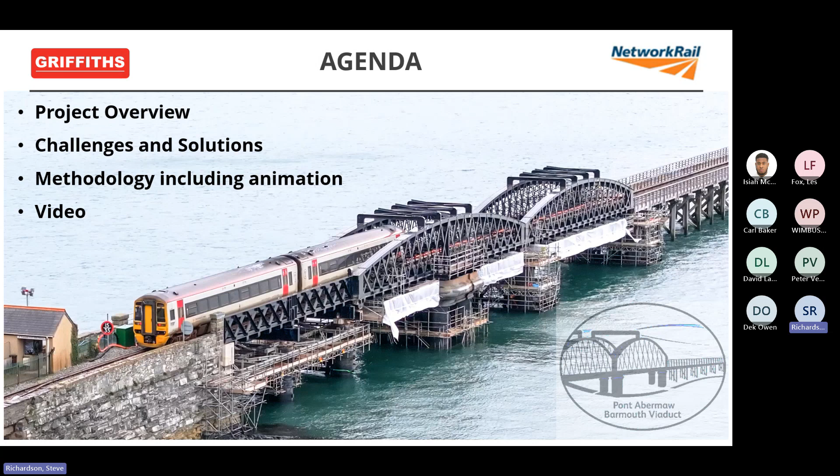And the video, which by the sounds of it, I'm going to have to apologise for now, because I suspect it may not run quite the way I want it to, but it'll hopefully give you a pretty good feel of what we did. So the viaduct itself, it was first opened in 1867.

It was originally designed by Henry Conybeare and Benjamin Piercy. It didn't look like the structure that we see today. It was actually a drawbridge, a short section for the navigation span. In 1899 to 1902 to be more precise, it was rebuilt into the structure that we see now, which incorporates the swing span.

A few minor interesting bits from that: the original piers 1 and 2 are from the very original 1867 construction. The other piers, 3, 4 and 5 - pier 3 being the one that supports the swing span with the 4 columns, then 4 and 5 after that, leading up to the timber one.

They were brand new on a slightly different alignment to the original one. And that's significant because, hopefully this can be seen relatively easily, these 2 beams here are there specifically because the alignment of the main girders compared to the cylinders is offset for those 2, because they changed the alignment when they did the reconstruction. That causes its own problems later on from our point of view in terms of how we actually reconstruct those elements of the bridge.

It's an iconic railway. It's Grade 2 star listed.

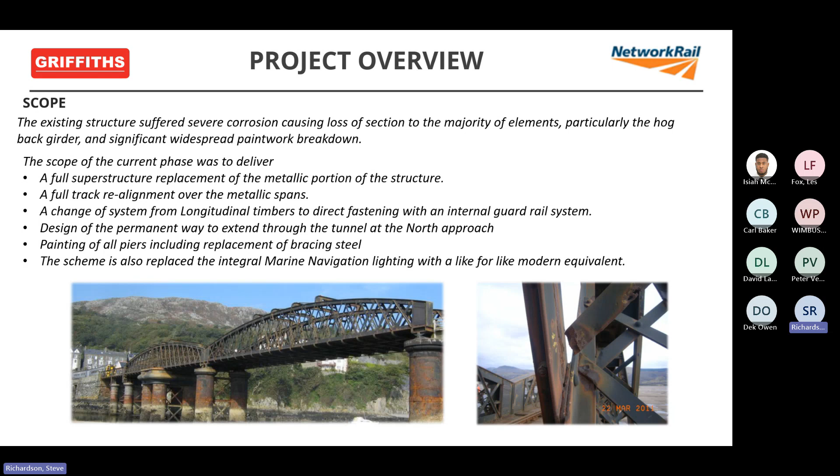Most of us, myself included, kind of shook our heads initially at that thought. But the first time I saw the bridge for the trial erection in Carvers, unpainted for that matter, with the rivets on, it was very clearly the right decision. Had it gone back without them, it would just not have looked right at all. It's quite crazy that that's the situation we're in.

So the bridge itself sits in a tidal estuary off Mawddach - I'll never say it right, I'm not even going to attempt it because I'll insult anybody that's Welsh. You've got a tidal range of up to 5 metres on spring tides. Parts of the structure towards the timber section, so Pier 5, the fixed span, often dry out at the extreme tides, whilst the navigation span never dries out. So we've got a combination of sometimes having water on bits of it, and at the same time not having water underneath other bits of it.

The entire area is triple SSSI, so that brings its own issues.

Originally, as part of the feasibility before we even tendered for this scheme, we considered a causeway. That was pretty much dismissed due to the fact that it's tidal, with a 5 metre range, and the impact it would have had on the tourist town of Barmouth. The work was carried out over the winter period, starting beginning of September into December for the main blockade, purely to minimise disruption for the tourist trade in Barmouth. But a causeway would have meant building at the height of summer leading up to that, which would have been a particular issue. So that was dismissed as a result.

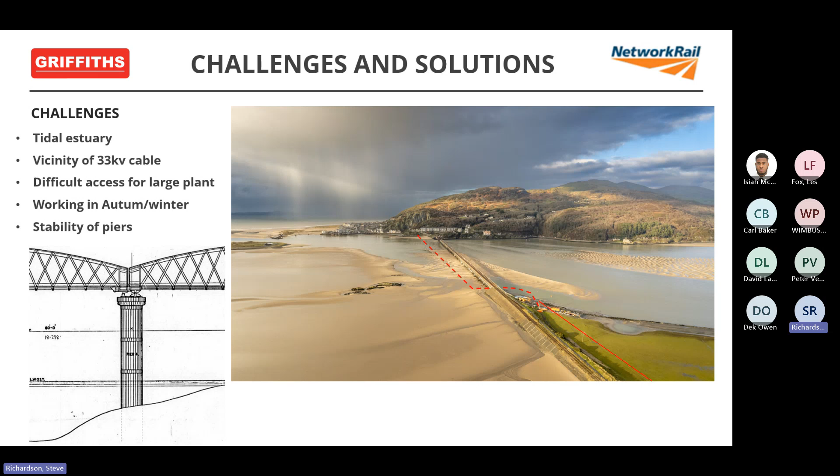Additionally, there's an FTN cable that runs across the bridge - one of my Network Rail colleagues described it as the M4 of information for the area. So there was no diversion going to happen to it, meaning we had to find a way of supporting that in situ for the entire time.

So we couldn't crane it in by sea, and we had to maintain stability for the piers. We decided to bring in pretty much everything in terms of the new works, to a degree, by rail. We've got a perfectly good railway system there - our site compound, which we already had for the timber refurbishment, has a straight track right to the bridge from north of the Barmouth Viaduct station. So we decided to bring everything in that way to avoid any waterborne cranes and such like.

What we decided to do is bring in two hogback beams and adapt them with a series of temporary works to create an 85-metre long runway system for a gantry crane. That gantry crane would then be used to demolish the existing bridge and to build the panel sections of the new bridge - I'll explain more as I go on.

So when we did the demolition, we literally cut it into 23-ton sections, approximately 4 metres linear length along the bridge and 8 metres in plan, and dropped them down onto pontoons - simply plastic pontoons, a bit of an adaptation of that type. It's a company called Scaflow who provided those. We dropped them down onto those and took them to a nearby beach.

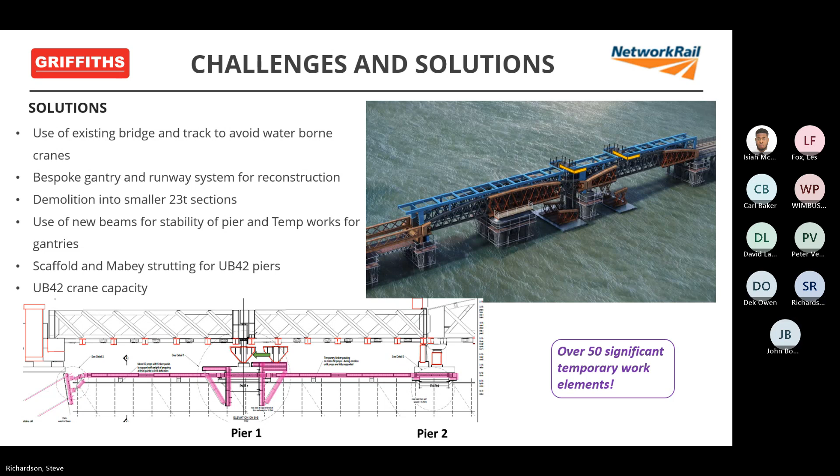Of note, there is 50 significant temporary works elements within the scheme, and when I say significant, I don't talk about fencing or hoarding or minor little pieces. I mean, there was temporary works to put temporary works in at certain stages with it as well. I'm talking about the gantries, the runway beams, the beams underneath that spread the load from the new beams in their narrow positions down onto the cylinders. Temporary works to change the bracing of the actual piers themselves. An awful lot of temporary works involved in that.

So, to get the hogback beams, which are 40 metres long, to the bridge, we adopted a Unimog, which is perfectly capable of pulling 600 tonne. This unit, as you look at that photograph there, is circa 200 tonne, just shy of 200 tonne that we brought it down in. We brought that down on 6 trailers, 4 40-tonne trailers and 2 20-tonne trailers.

Each one of them had their own bespoke piece of temporary works on it to spread the load back directly into the axles from the pickup positions that were obviously dictated by the actual bridge itself and the nodal points within the bridge. And almost as a suspension system, to be honest with you, we had 20-tonne jacks along the system, and that was used to basically stabilise the entire structure as she ran down to the bridge.

You've got to bear in mind that we were running on existing track. Now, the existing track on the timber structure was actually in pretty good condition because we'd only renewed it a year and a bit earlier, to be perfectly precise. The section between our compound and the bridge had actually been down for a renewal, but it hadn't happened, it had been cancelled. So we were running very much on the existing track.

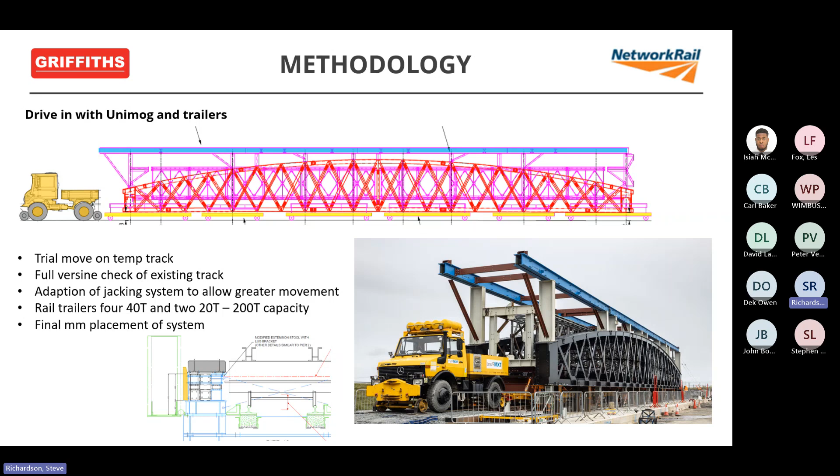This is a short element of the animation that just shows it being driven in. One of the things is the wind bracing on the top had to be raised up because the entire thing got brought in at higher than its final position, and it eventually got jacked down. I kind of skated over that because I'd be here forever if I talked about every single piece of temporary works.

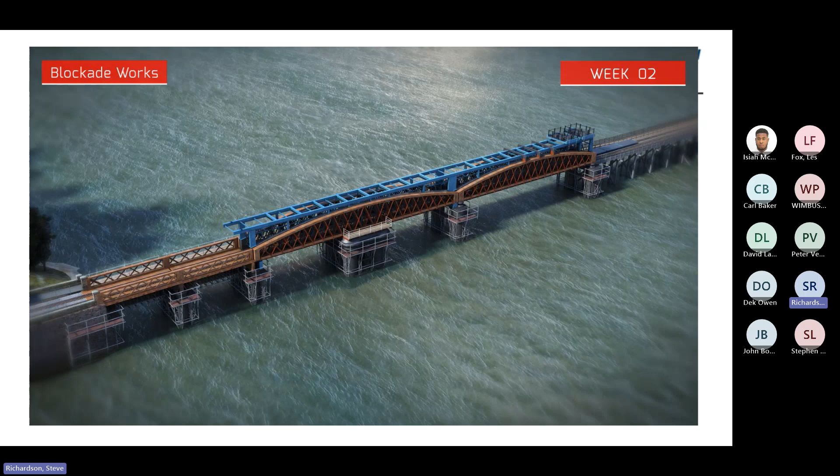Right, so once we got the hogback sections down there with the temporary works, and you can see the temporary runway being there, that's the blue section. All of the grey sections are all temporary works. The grillage that you can see running through the centre, that's all temporary works. That was simply to keep everything together, basically. Acted as resistance for when we jacked them apart.

It also acted as our access point. You can see the timber internally and the timber on top, so that was basically a walkway that we could then walk right across the bridge as we were doing the demolition.

So when we come to the demolition, what you had was beams coming off the underside of the runway, and the runway beams that then had Macalloy bars dropping down to a clamping arrangement on the top flange. Every one of the 23-ton sections had 4 of these. So basically, we would bring this in, connect it all up.

Once everything was connected up, the demolition crew could literally cut it into the 7 sections. They didn't have to wait for anything to be dropped or lowered or for us to do anything else. They literally went from start to finish and just cut the sections up, basically. We did start, obviously, dropping them as soon as we could, but they just kept on going, and that was the one advantage that we had with that system.

So they're initially bolted to the underside. As you can imagine, some of the sections have to be moved longitudinally before we can then lower them down onto the pontoon. The gantries are bespoke. They are specifically designed for this, for nothing else.

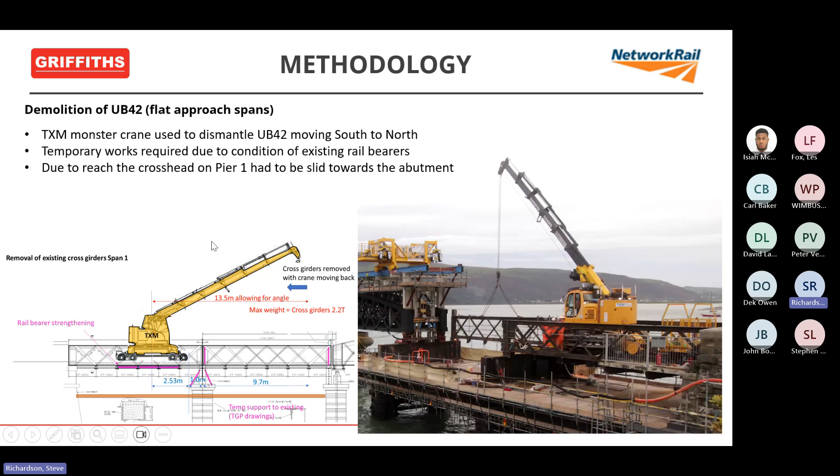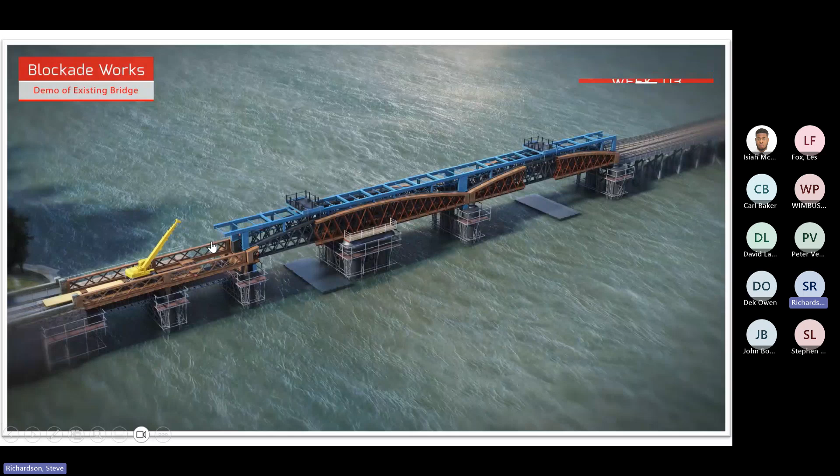So here you see the demolition that I've just talked about. So the 23-ton sections being lowered, and at the same time the TXM crane taking apart the bridge 42. Obviously, a little bit of artistic license. We didn't just lift them straight through that girder. That was all taken apart. So it's like.

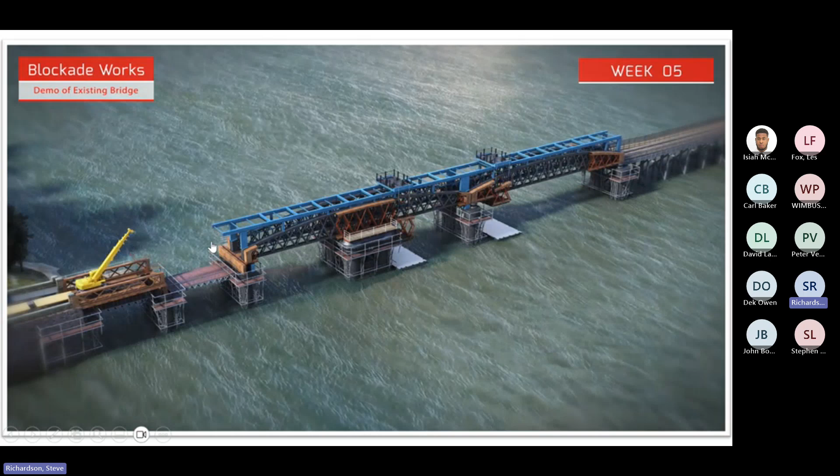And again, the gantry was designed obviously not only just to lift up and down, but also to lift and move at the same time. There's that ring beam going up. I remember talking to TGP designer David Dawson, and he made the comment that when we took the ring beam out, we took it the other way, and on his drawings he actually showed it going the other way. It didn't make any difference, but I remember him commenting on it.

So we've now got the new main beams with all of the temporary works on top of them and the structure in between the two, but they are narrow basically. Yeah, they are not to the width that they need to be. They need to be moved approximately 963 mil east and west, basically, so out over. That was performed using a series of push-pull jacks, 8 of them in total. Each one of them was a 20-ton jack.

We didn't need anywhere near that type of capacity, but they were used purely for the stability element of the main beams. Can you imagine you've got a 40-metre beam? She's some 4 meters high at the maximum. In fact, probably slightly taller than that, actually, thinking about it. And we're going to push one apart at a time.

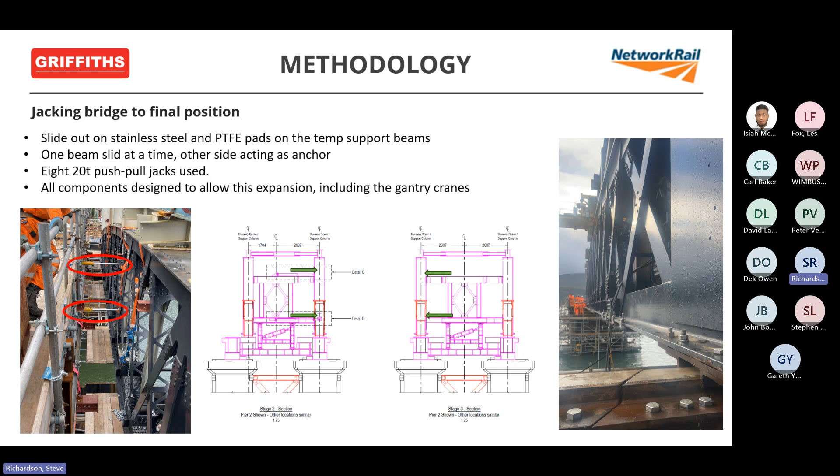And the gantries themselves, which weigh in at just shy of 10 ton each, were also designed telescopically. So when we pushed them apart, the gantries just simply came with it. Originally we thought we might have to take them off, adapt them and put them back on again. But we just simply left them in place, put them right in the middle, pushed it apart, and did it that way. And I don't know whether video is coming through to those people on the Teams call, but you can see there a little time lapse of it being pushed across.

So we now get on to the cross girders that I mentioned before about Pier 2, and also a system that we then used for changing the panels on the underside. But you've got to bear in mind this bridge is quite unique in so much as the cross girders bolt directly to the underside of the bottom flange. Most cross girders in most bridges sit above the bottom flange and are bolted either to the web or to the top of the bottom flange. These are basically suspended off the bolts. We have adapted the design slightly, so it's slightly better than that, but they are basically suspended off the bolts.

And we needed to get these 2 beams off Pier 2. So the way that we did that, we bolted the 2 spans together at Pier 4. So Pier 4 is here. They're actually bolted together in here. This little diamond shape that you see here, the connections here, bolted in. We only needed a very small number of bolts.

TGP very reliably told me, although we did have an awful lot of holes there for the next element of the works. So I insisted that we put them all in. So each one of those connections had about 30 bolts in it, even though technically I think it only needed about 10. But I went crackers with that. So we bolted them together at Pier 4. We had a jacking system at Pier 3, and we literally jacked the system up until it released above Pier 2. Once we'd done that, we locked the jacks off.

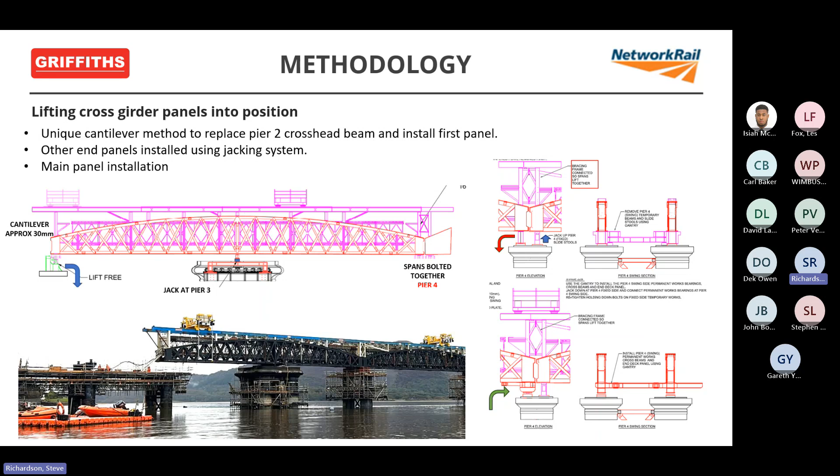So that then gets it back to its final height, its final position laterally, which it already had been because of the jacking, and then we could start installing the main decks. So then we literally just pick these up, slide them into place. They're bolted to the underside. We agreed a minimum number of bolts that we could do.

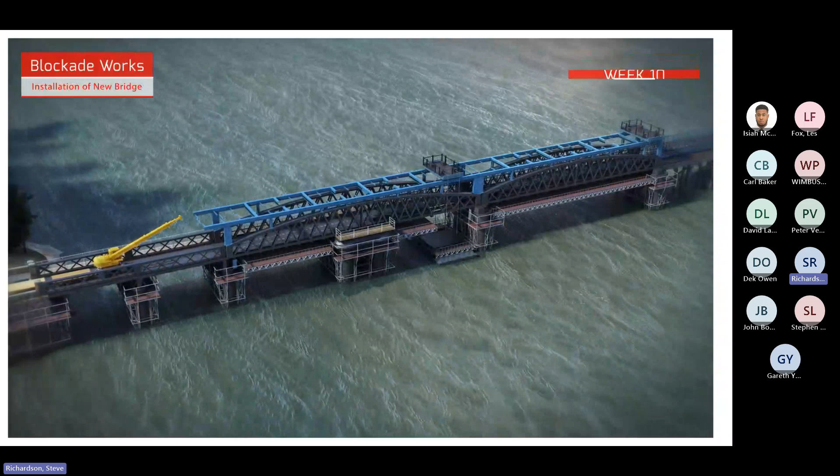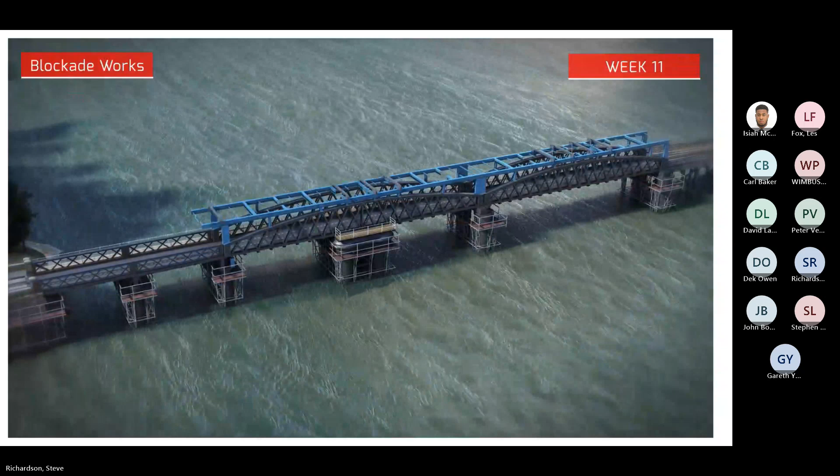And what we did as well is that where we needed to, we lifted them up with scaffolding already hanging from them, so that we had instant access. Because each one of these panels had about 300 bolts in the permanent situation to put in. We only needed about 24 bolts to secure it correctly in the first instance, and then all of the rest of the bolts were there for the splicing and such like.

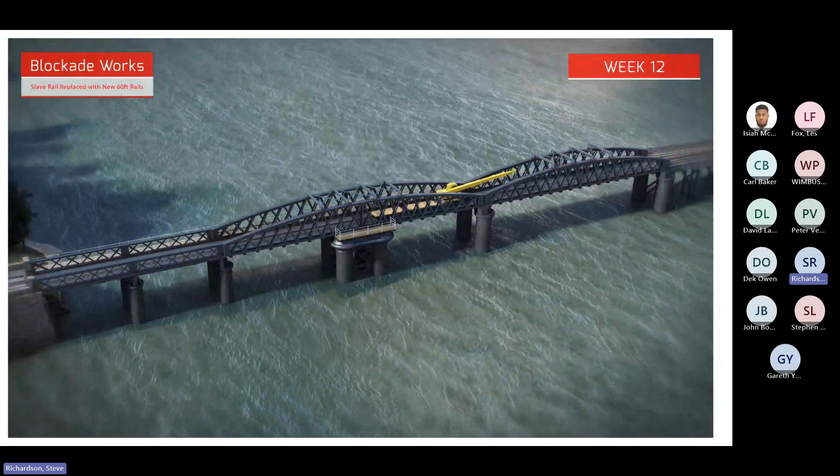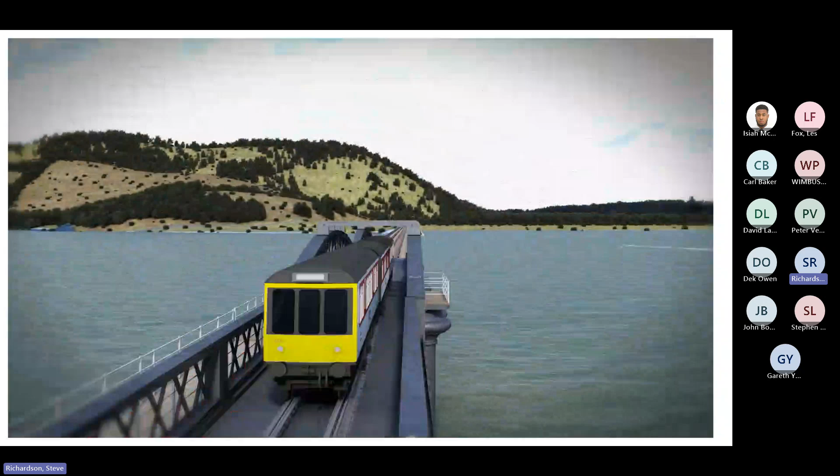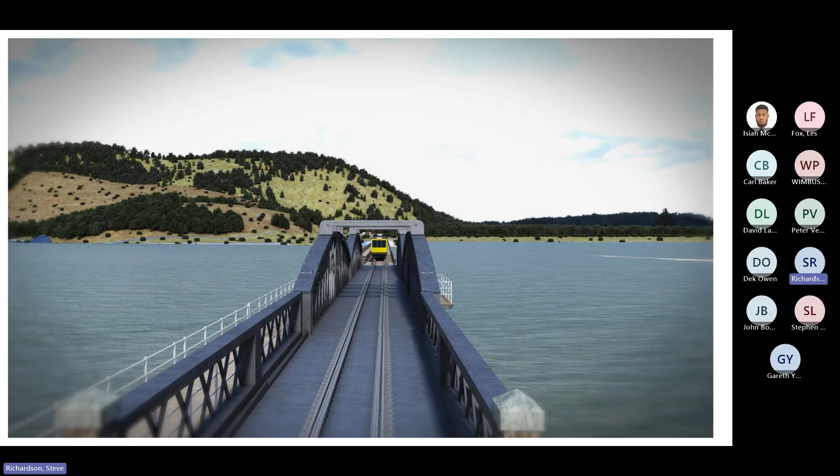So once that was done, the other thing there was that those panels also were lifted with slave rail, exactly the width of the panel, so that once we had put them in, we had a running railway. We obviously fitted a set of clamps to make sure that everything stayed together. That allowed us to remove the temporary works quickly by simply bringing trailers in underneath it, jacking it down onto the trailers and taking it away. And then we had a running railway in order to actually put the 60-foot rail and the guardrail in.

So, I hope the video works to some degree. What we'll do now is I'll run through, I'll hopefully not speak too much during the video. So what you'll see now on the video is the assembly of the main girders at Morfa on that test track that I was talking about. You'll see the trial move we did about 6 weeks before the main blockade. You'll then see it driving down the track.

A significant thing there is that with all of our technology and all of our really good devices, in order to make sure that she didn't tip excessively, we simply used a spirit level sitting right in the middle of the entire system. In order to look at that spirit level, I positioned my GoPro, pointed it at it, put it on preview mode on my phone, and literally myself and the guys who were in control of the jacks watched it.

And the second it started to move, they went, right, we'll just adjust that back up again, thank you, and on we go. To be honest with you, they got to the point where they locked off one side, left the other side floating, and it pretty much sorted itself out all the way down. Once we got onto the timber structure, it was plain sailing after that.

You'll see the demolition, and as long as it plays correctly, you'll notice the ring beam coming out. Got some very good footage of the ring beam coming out, and you'll see hopefully the gap. You'll see the sliding of the main beams coming out. You'll see the cantilever section, with some very good photographs of it.

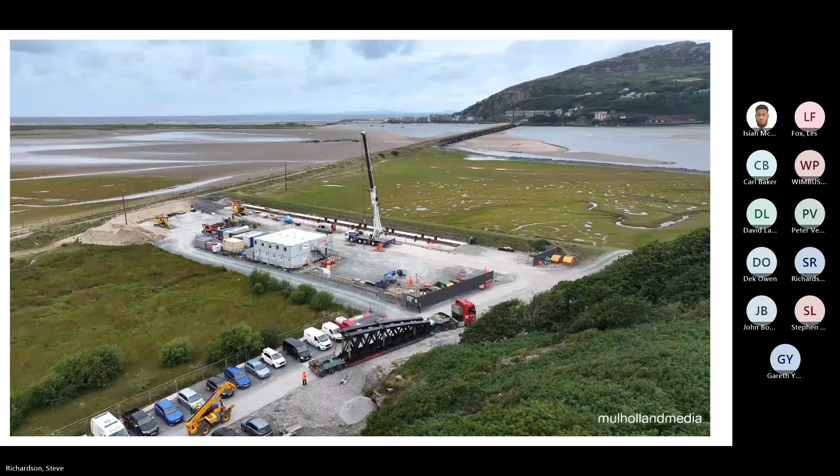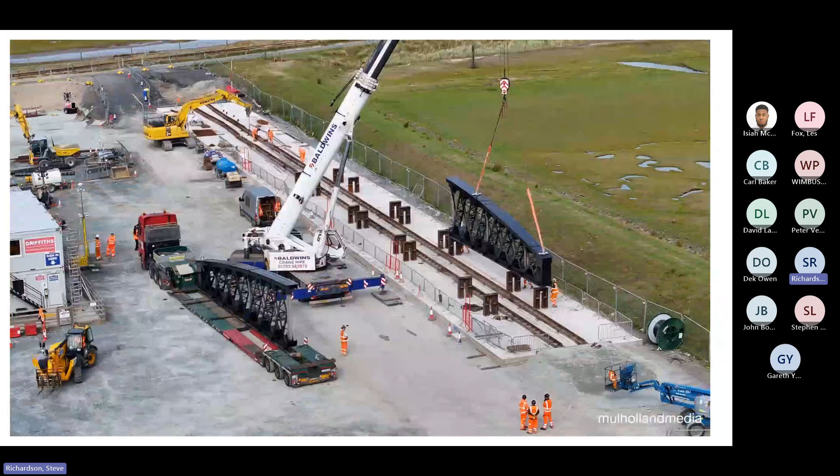So the bridge sections came in thirds. It was originally designed as fifths, but carvers worked out that they could actually bring it in thirds, so they brought it in thirds in the end. You see the rivets along the top, on the top flanges there.

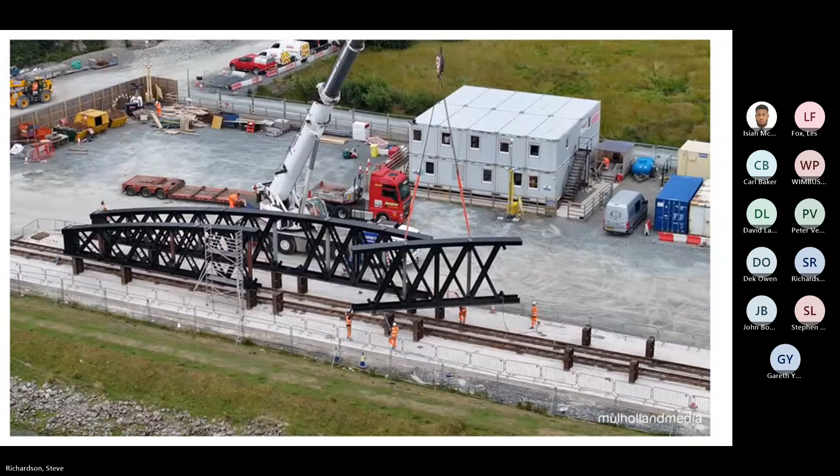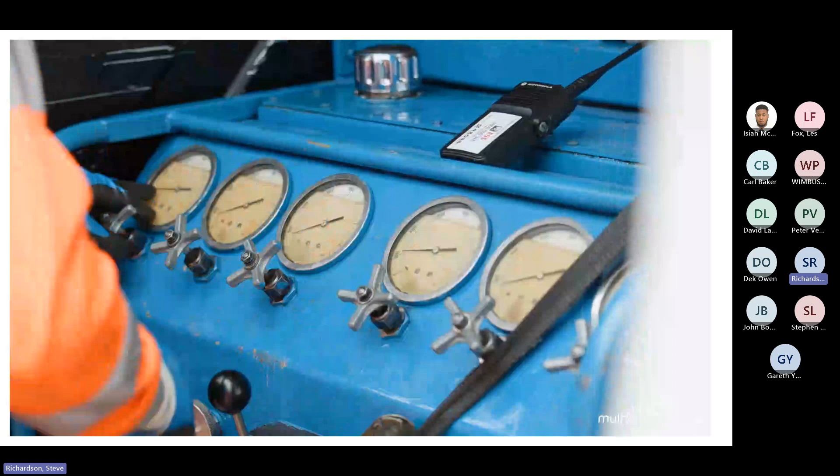So you see that obviously the temporary track that we laid, we built it at the width that it was then going to travel down. So literally we built it in its entirety, took it apart, and then put it back together again as the 3 different sections.

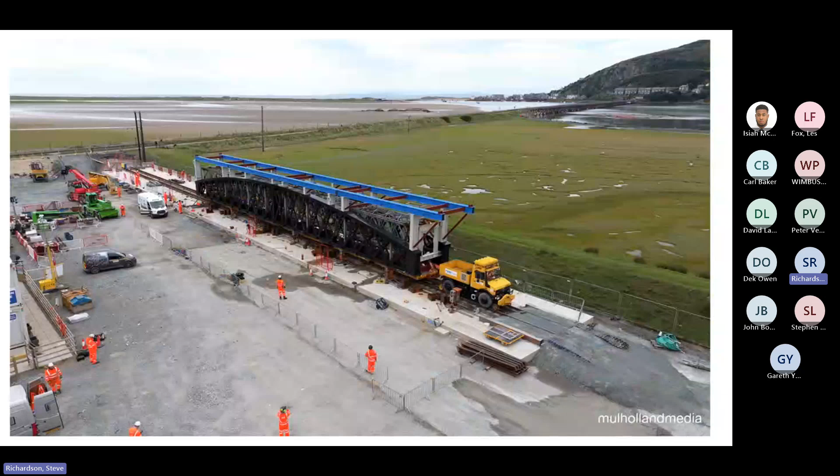There's an awful lot of use of ratchet straps on this contract, to be perfectly honest with you. So holding an awful lot of that down, and it's designed - it wasn't just us throwing it in there for the fun of it, it was all designed to be done that way.

So yeah, the blue beams are the runway beams for the gantry. And you can see in the distance the wind bracing that's been raised.

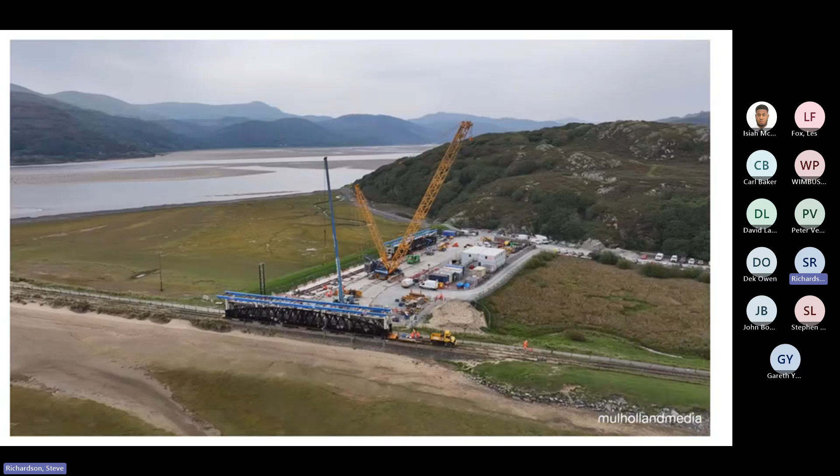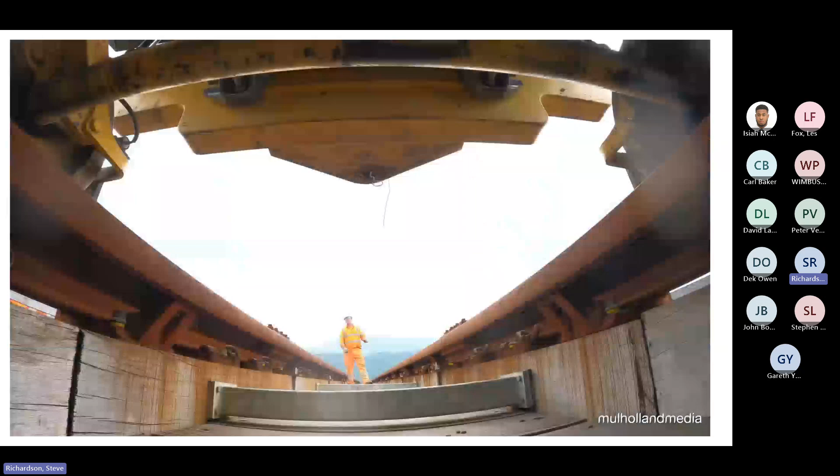So this is within the blockade now. To our knowledge, 200 tonne of bridge hasn't really been driven down the track like this before. There has been a job in the 80s that was a little bit similar to this, but not quite to this extent.

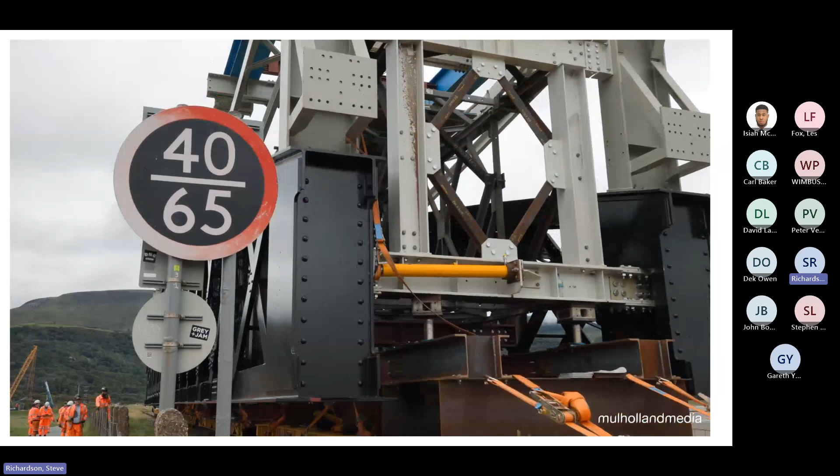As you can see the jacking system there. So an awful lot of the stuff was already in the bridge, even though it wasn't going to be used for weeks, just to save us that bit of time in the actual blockade itself.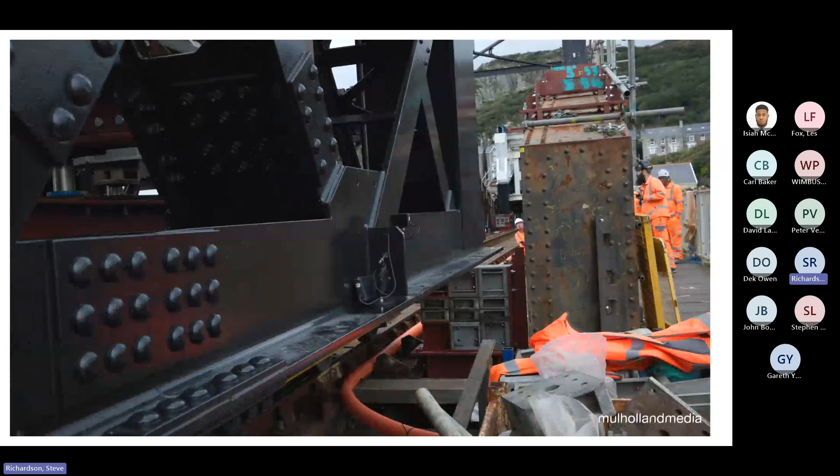You can see it coming in, you see the stools that it sits down on. So that's the gantry being lifted in whilst we were still bringing in the section, and obviously the section's been cut.

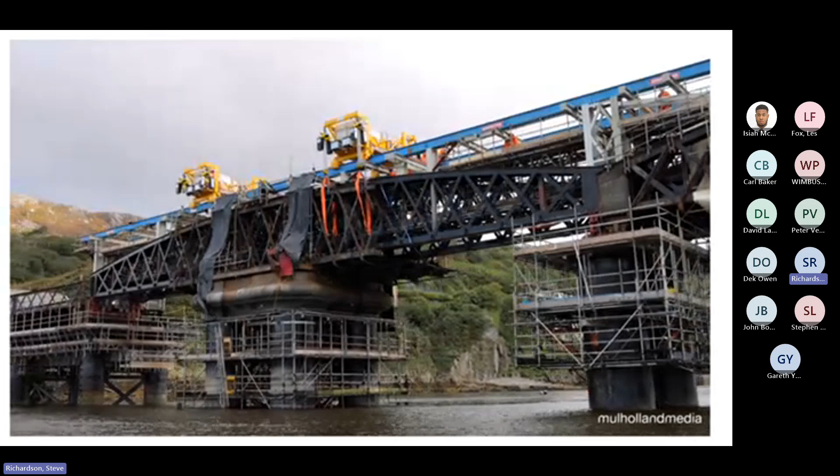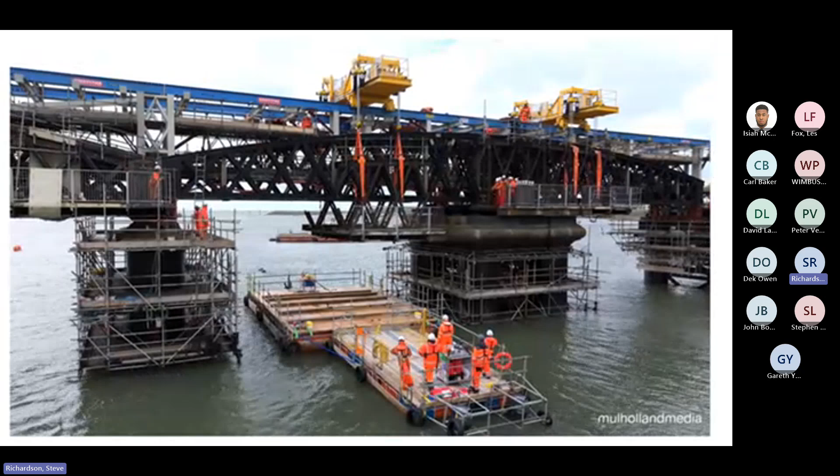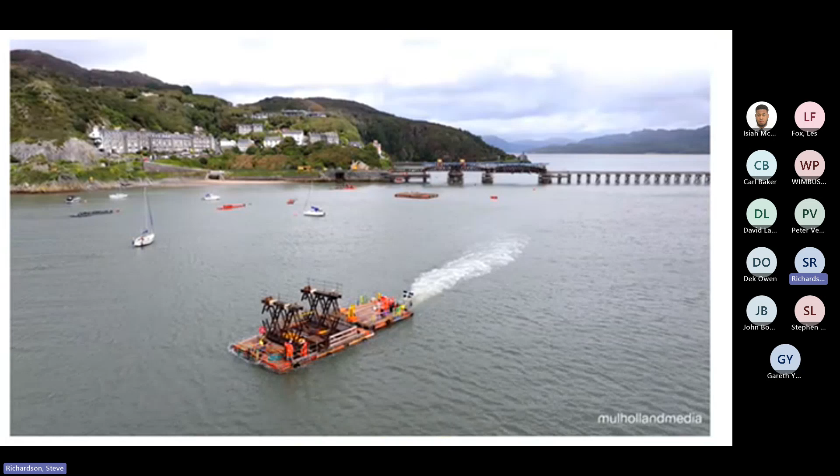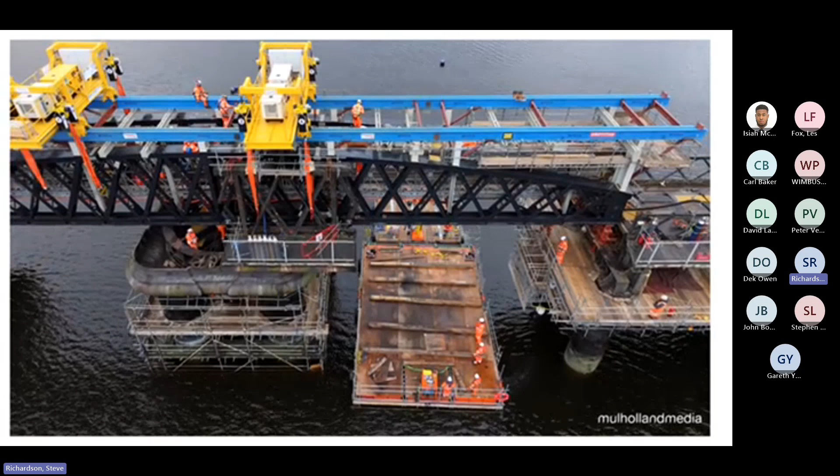Again, even the ratchet straps holding it in place for stability were all designed from the pontoon's point of view. The gantries we named Henry and Benjamin, after the original designers of the bridge.

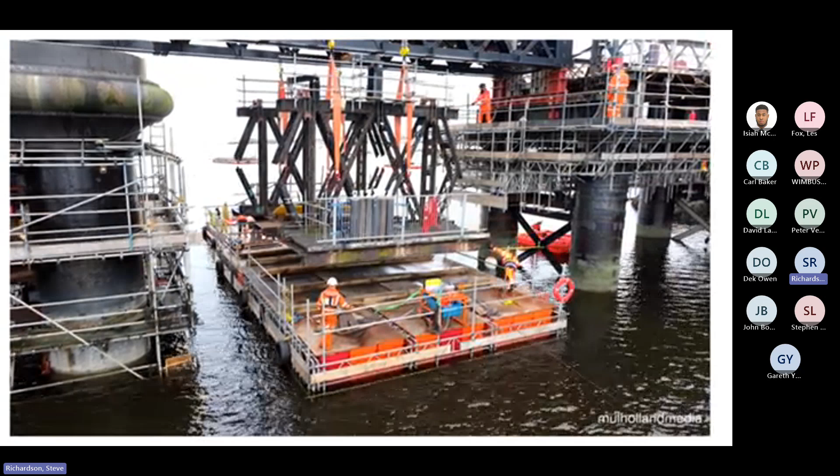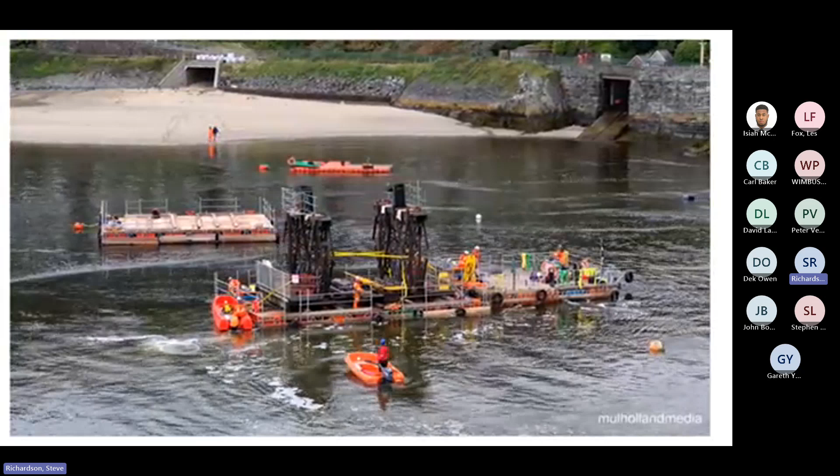See the ring beam in center there. So this is the ring beam being removed. See what I mean about the gap?

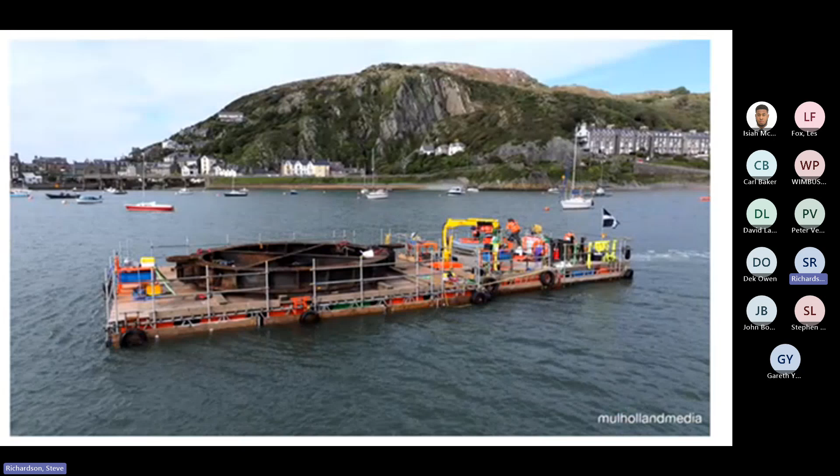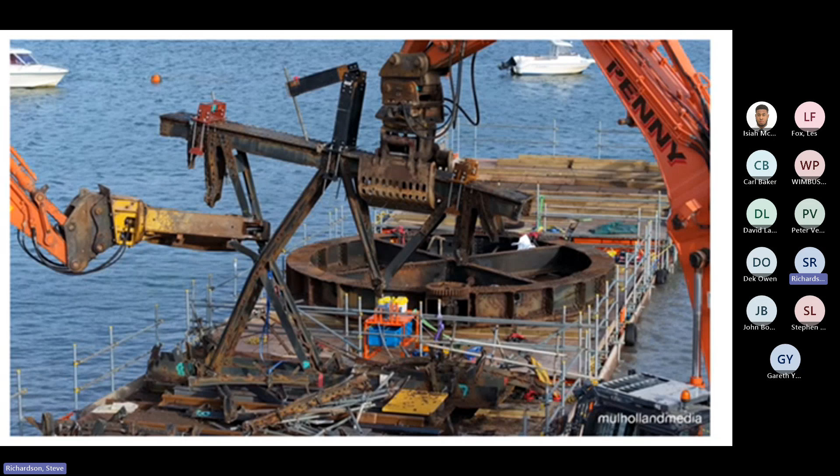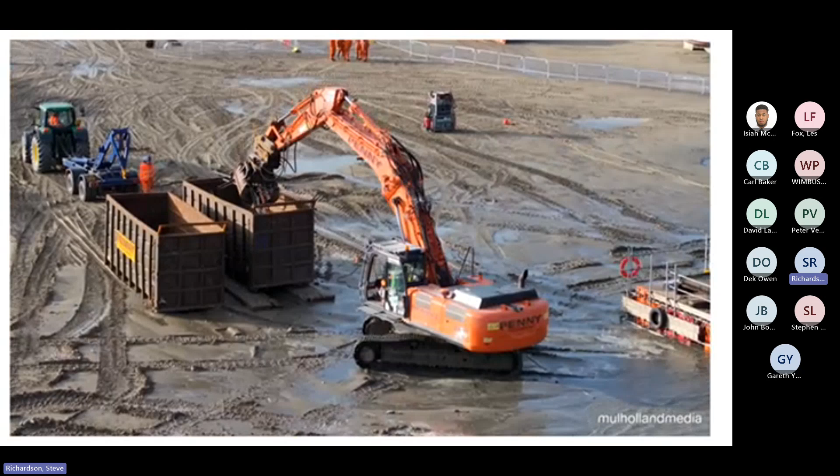So there you can see us cutting the sections up on the beach. Logistically it was interesting because we could only move anything at slack water, so there's about an hour opportunity to move things. Generally at high tide we then bring it into the beach and let it beach, and then come in at low tide to dismantle it. So there was an awful lot of planning around that.

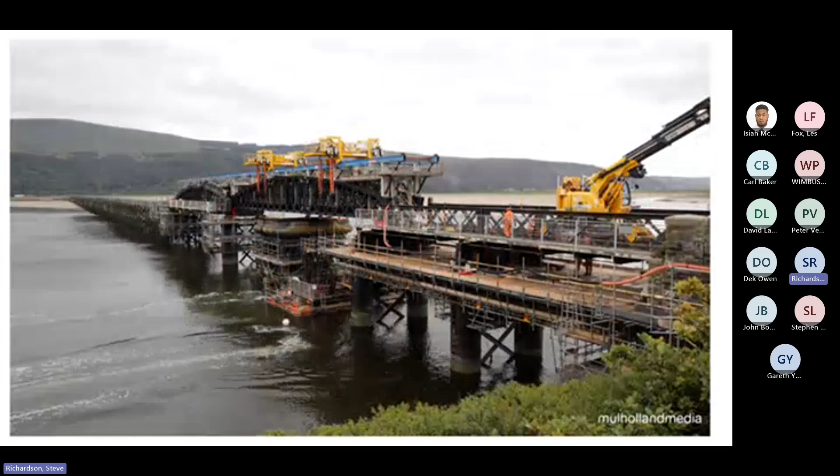So you can see the sections, there you go, the demolition section there. You see that get slid across, there you go. The ducting that you can see there is the fibre optic cable, so that we still always had a continuous path for it.

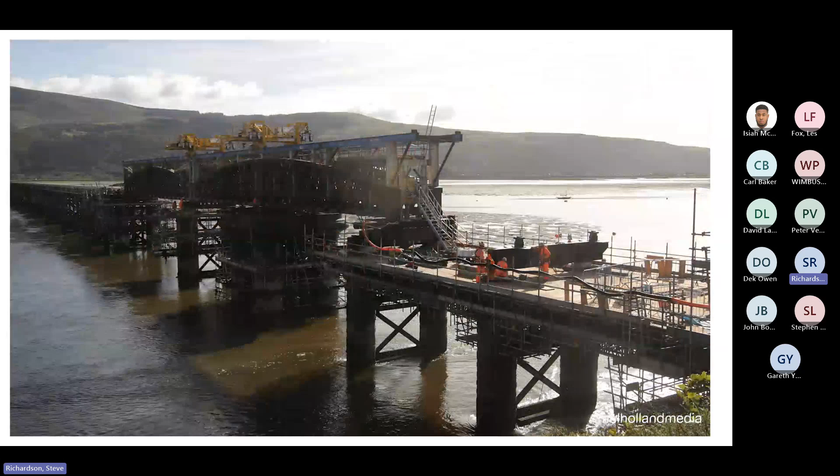And there's the slide out.

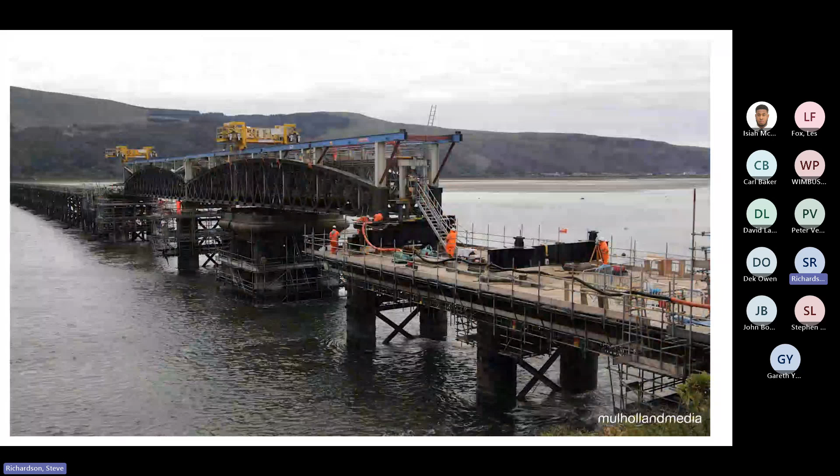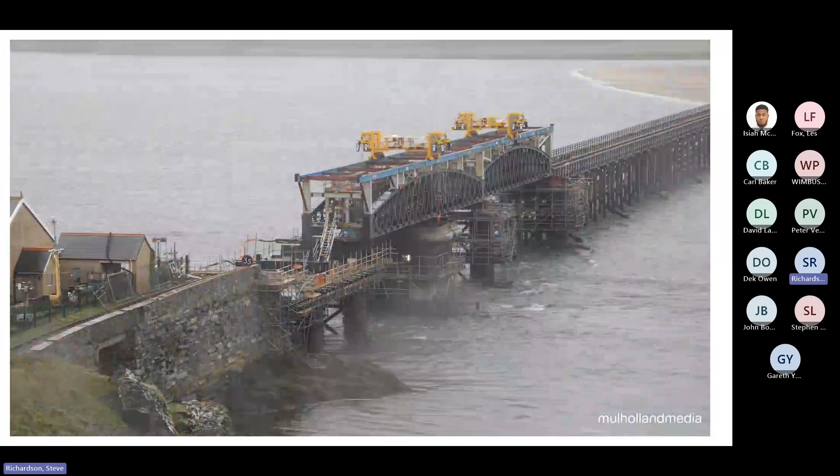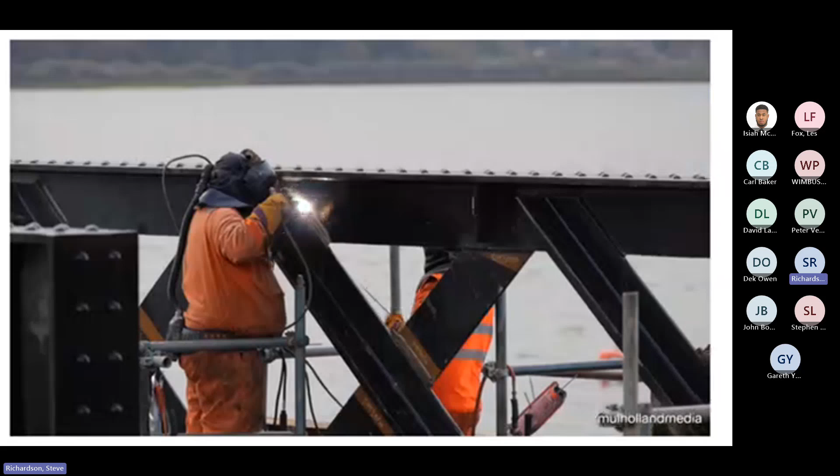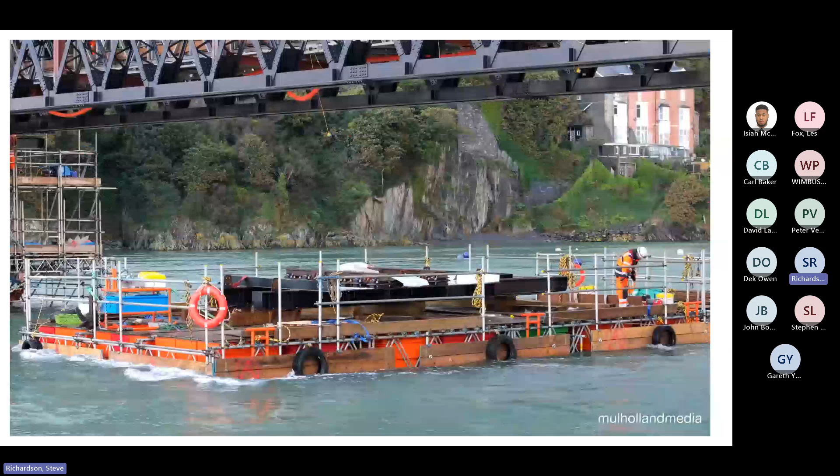See the sections missing there on that first span that was being lifted in, and then them being welded back in again. So these are the panels being lifted in. This panel here was one of the panels that goes above one of the piers, so it didn't have any scaffolding on it, because the scaffolding was already in existence around the piers. And those little upright lugs you can see are the change to the design, because they go in between the inverted T's, and then they have horizontal bolts in them as well as the vertical bolts, which is where the design is improved slightly in terms of the fixity. You see there, obviously, with it coming in with the rail.

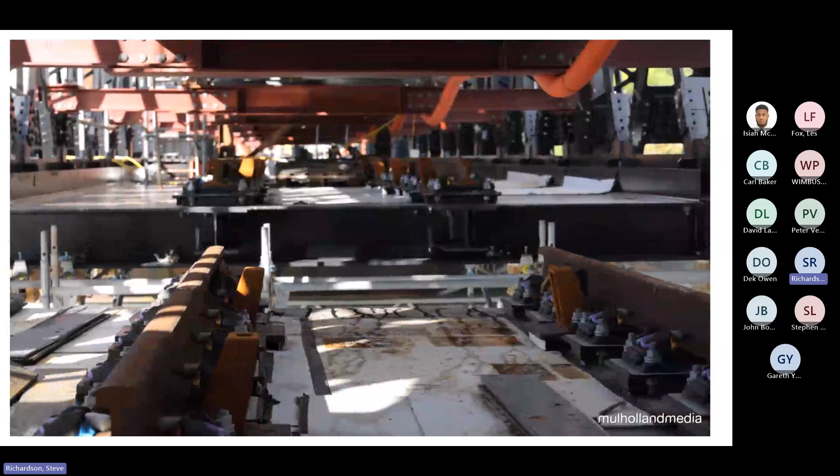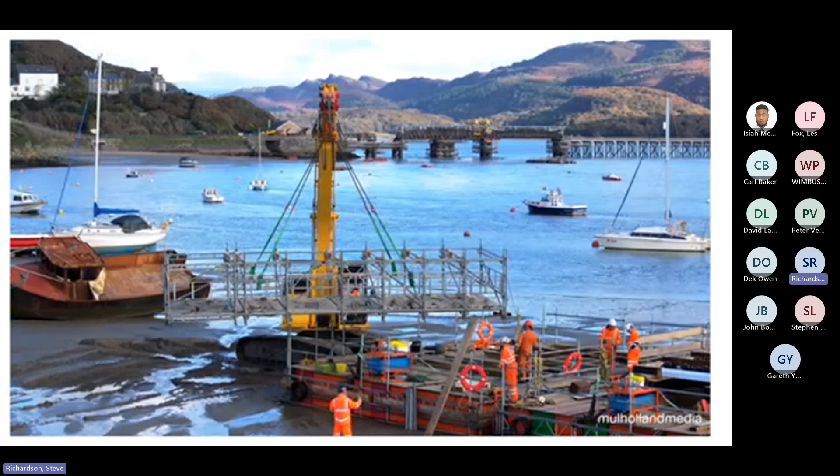And these are the sections of scaffolding. That scaffolding was designed to take the weight of the panel sitting on it from the pontoon, but then also to act as a suspended scaffold once it was picked up. We had neoprene pads at the connection points to avoid damaging the new paint.

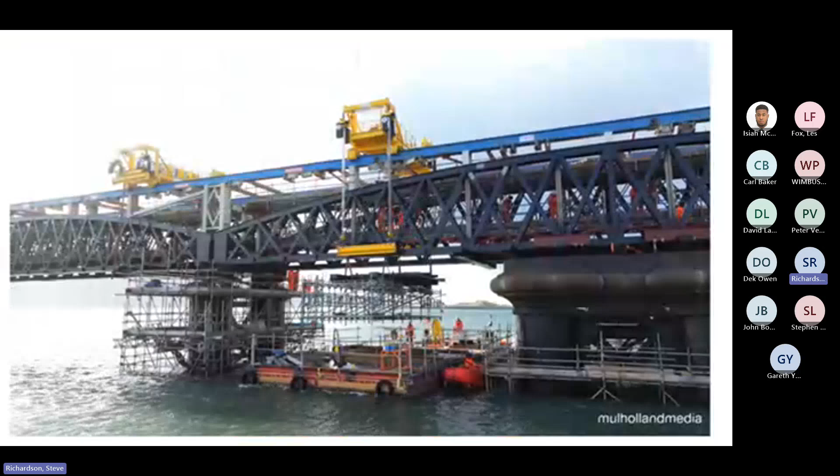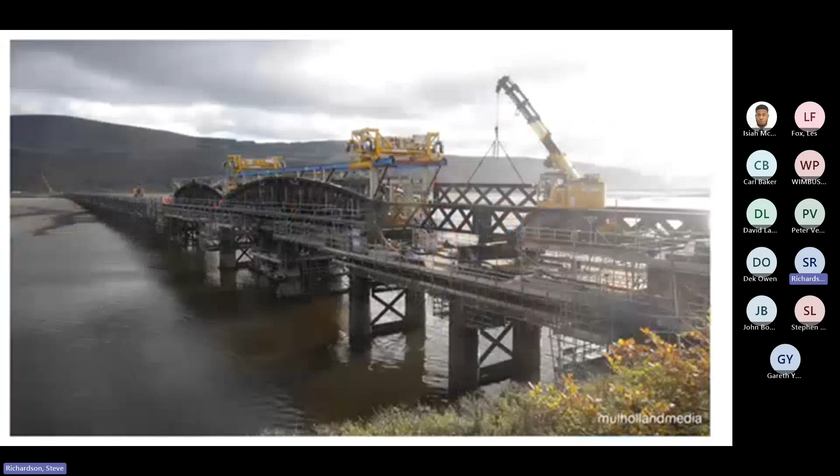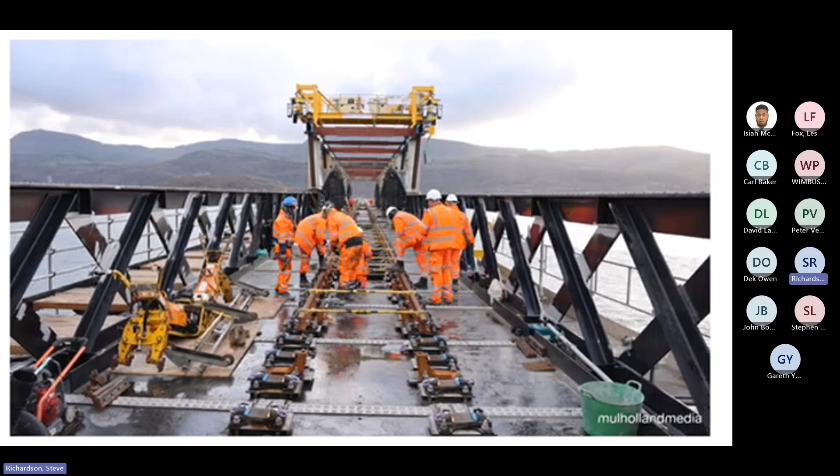Whilst all that's going on, we're obviously still rebuilding Bridge Point 2, which almost was a sideline, which in any other situation would have been an entire job all on its own. We did comment more than once that it always appeared that way, like it was just something else we were doing, but in reality, it's a major job all on its own.

The guardrail sits on a combination of Vossloh wherever we could, and then these bespoke 4-foot sections in there. The team was very keen that we had as much as we could a clear run through the 4-foot.

It's all jointed across the track. You see the splice joints underneath there. This is where I was saying there was over 300 bolts per panel to be put in, which is why we needed that instant access to put all those together.

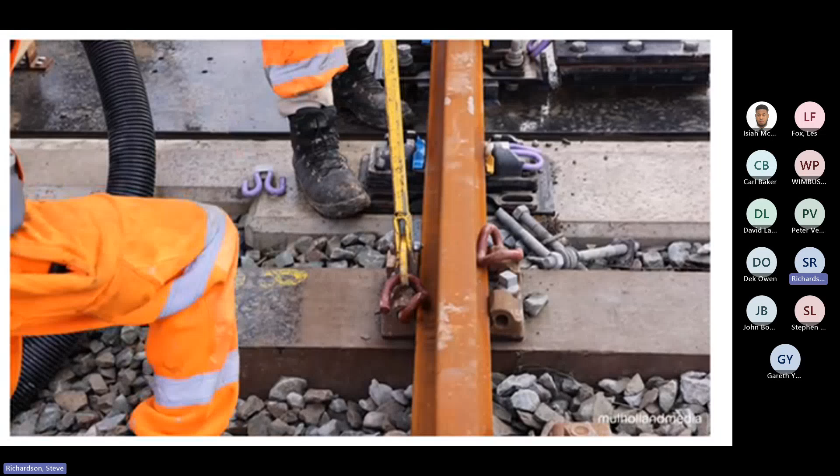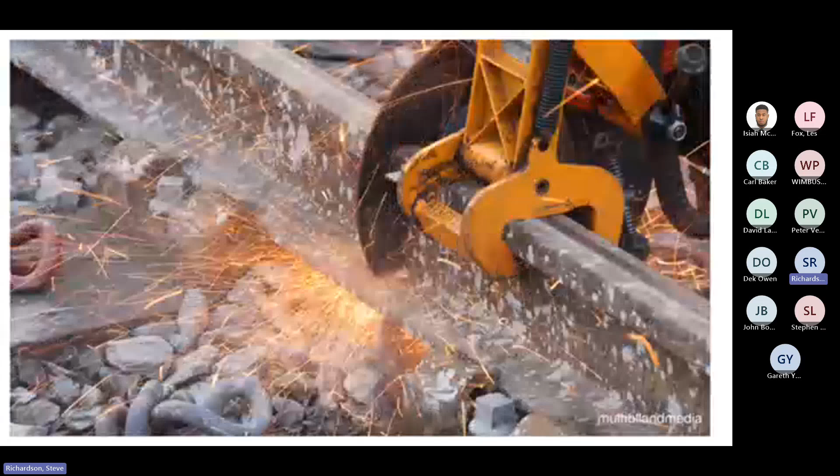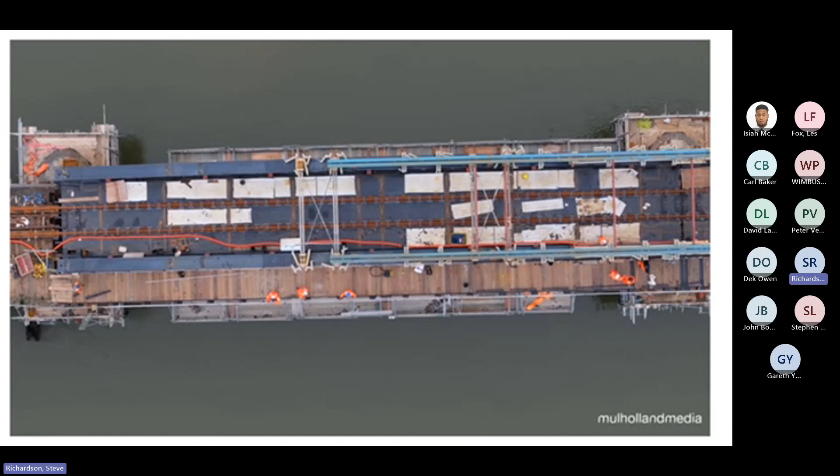And the scaffolding below allowed us to put that temporary handrailing up so that we could then fit the permanent handrail on the new deck, the new timber decking there.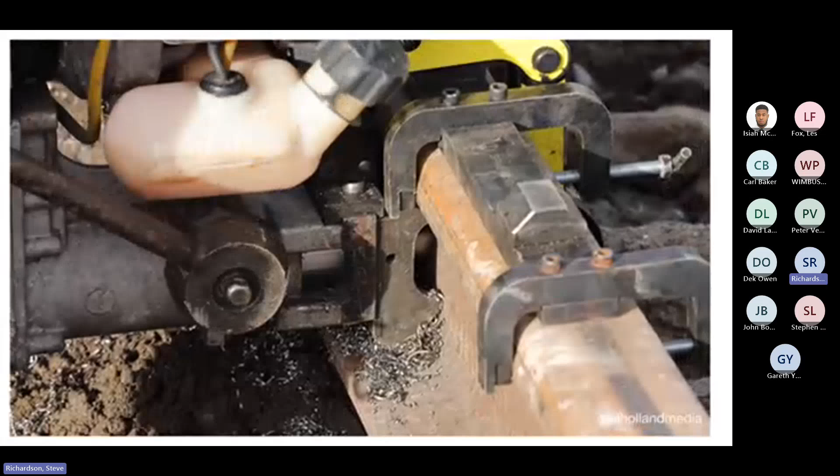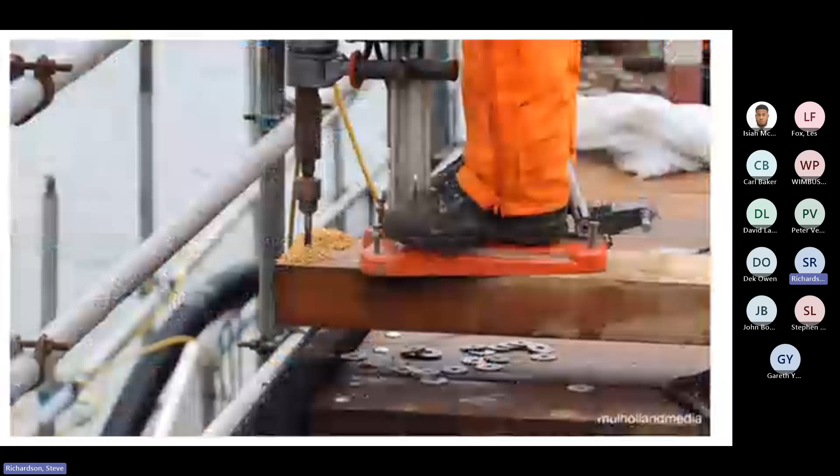This is the adaptation of the timber section, slight realignment.

This is the permanent handrailing, the new handrailing you can see there.

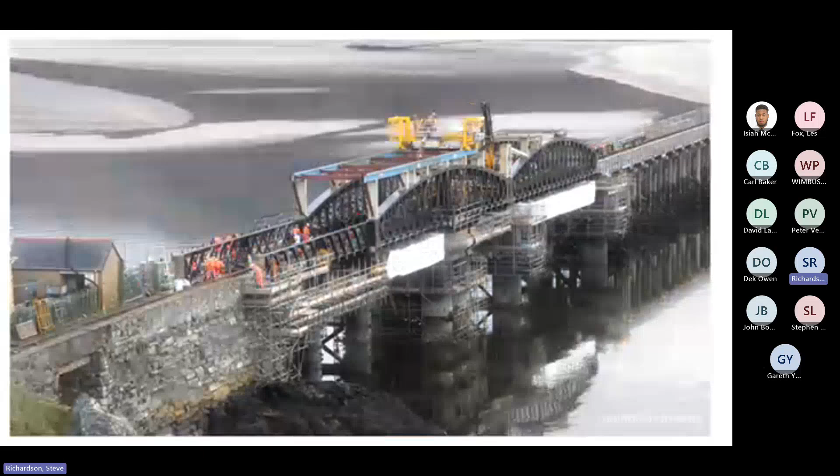And then once that was all done, we took all of the temporary works away and put in the new wind bracing. Again, there's a sequence to that to make sure that there's no issues in terms of any movement, such like.

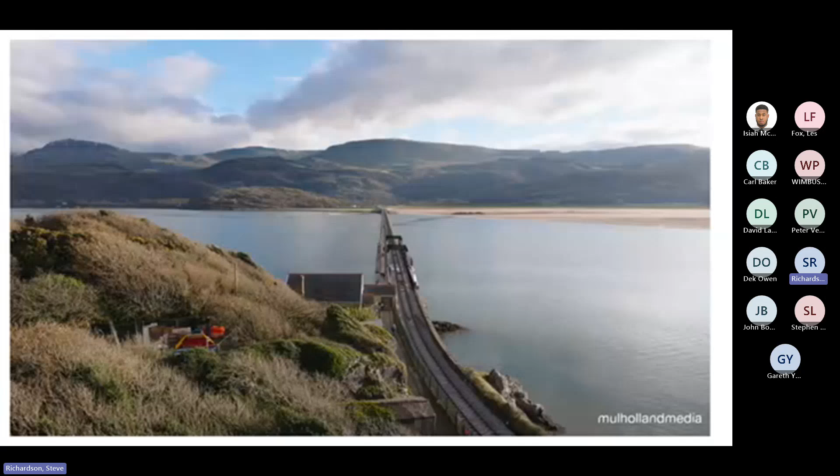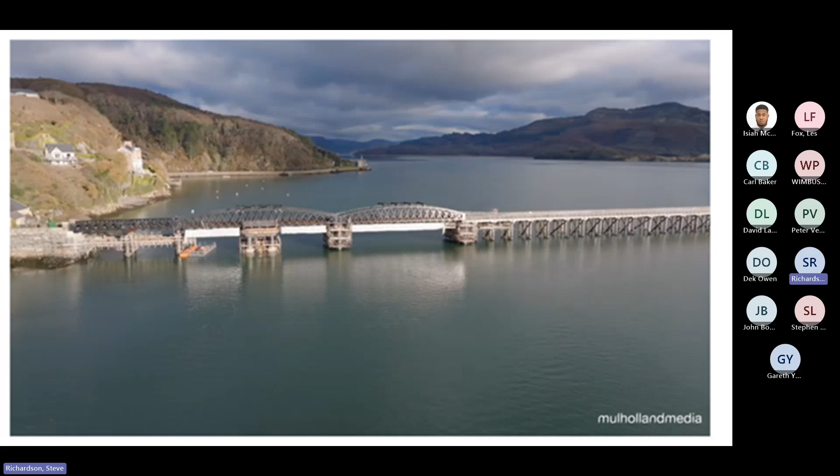And the scaffolding underneath was designed so that we can encapsulate it, so that we had at least a bit of protection from the weather in order to finish the bolting up and finish the painting of the bolts underneath.

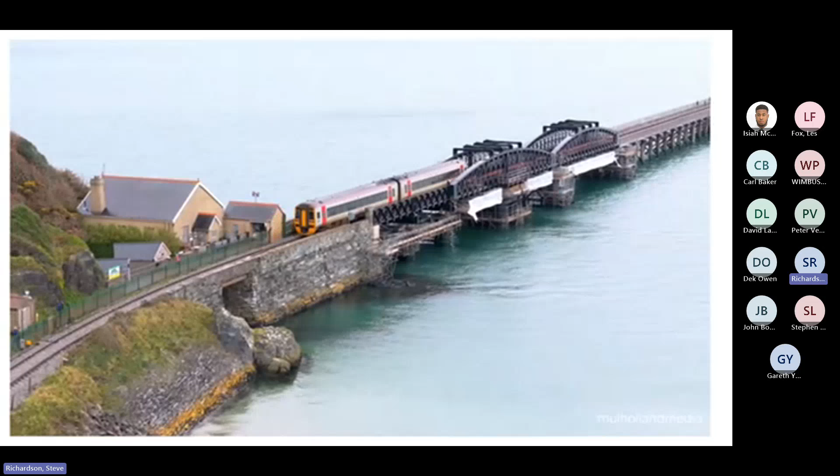Of note, though, we are still touching up the painting now. We handed it back on the 8th of December. But that's just a combination of the amount to do and weather.

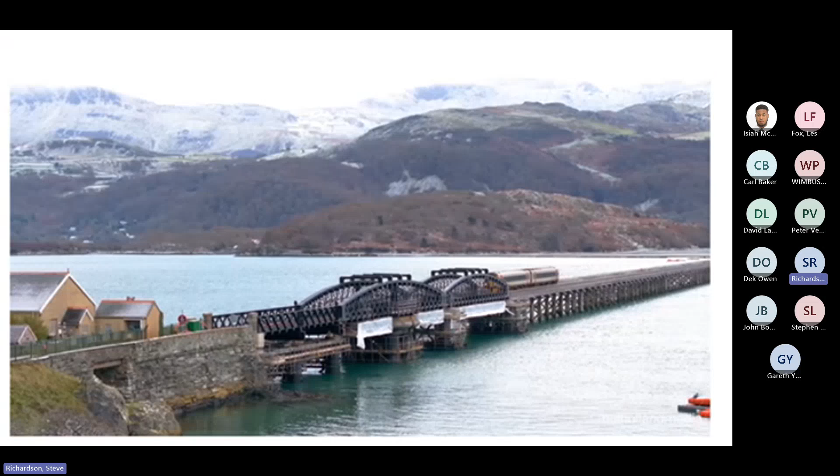That's our compound in the background there, you can see, with the square building, rectangular building.

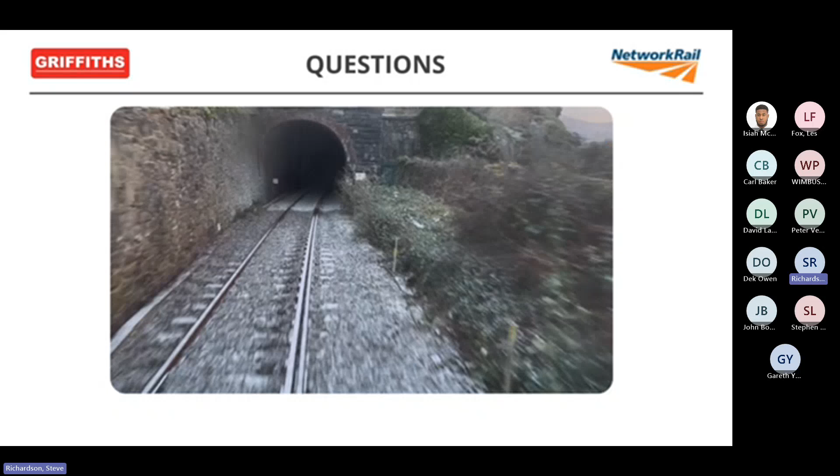So, questions? If you've enjoyed that, any questions either in the room or on Teams?

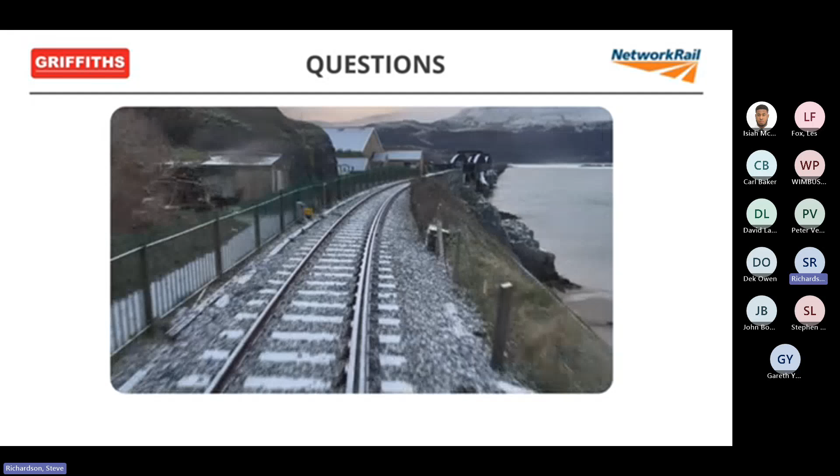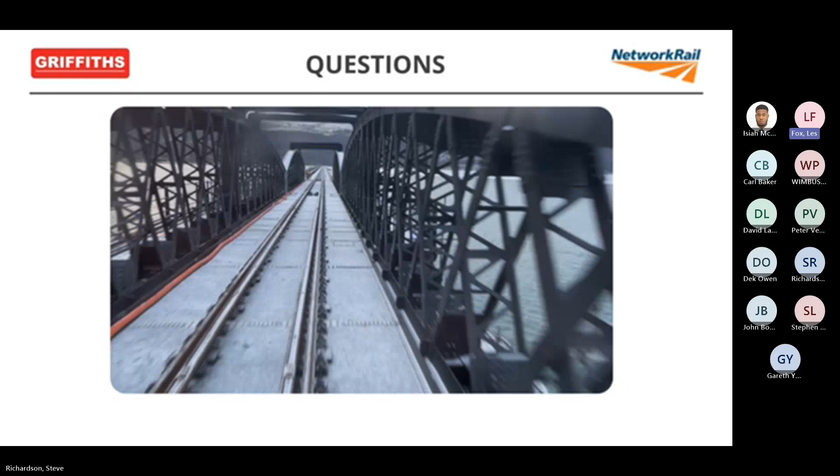Hi Steve, sorry I couldn't be there. I was planning to attend in person, but I couldn't make it because of work commitments. But yeah, fascinating talk. I was just going to ask, you mentioned that a lot of the track was renewed before you transported the new bridge deck in, but a section of it wasn't. I was wondering, on that section that wasn't renewed, did you have to do any fettling works or strengthening works to the track to make it good before you trafficked it with the bridge deck?

No, we inspected it. We had our track CRE, who's also a handback engineer, run through it all, make sure he was happy that there wasn't any particular issues. I think there were a few keys that you might have had, put back in and things like that. But yeah, it was actually good enough for what we needed. Axle loading wise, we weren't putting it under any more than RA5, which is what it's capable of anyway. So from that point of view, we didn't need to do anything major to it, thankfully.

Thanks, Steve. Excellent presentation, the videos were really superb - really brought the visual part of it to life. I've been following this job on social media, so it's great to see it all brought together and delivered on site.

Was it Pandrol VIPAs you put on the new deck with flat bottom rail? Yeah, Pandrol VIPAs - and it's still bullhead on the timber sections? No, it's flat bottom on the timber section now, all flat bottom all the way across. Interestingly, the guardrail on the metallic is bullhead, whereas the guardrail on the timber is flat bottom.

Slightly off-project question for you, Steve - is there any plan to improve pedestrian and cycle access off the north end of the viaduct into Barmouth town, because it's a nightmare at the moment? I'm aware of the BVAG organisation with Jamie Brooks there - we've had a lot of communication with him over the years, but they're not really any further forward than when I first spoke to him 5 or 6 years ago. So I would say probably not.

Okay, and I appreciate what you're saying about the end of that - as you come up onto the road, it is not the best. No. Thanks, appreciate that.